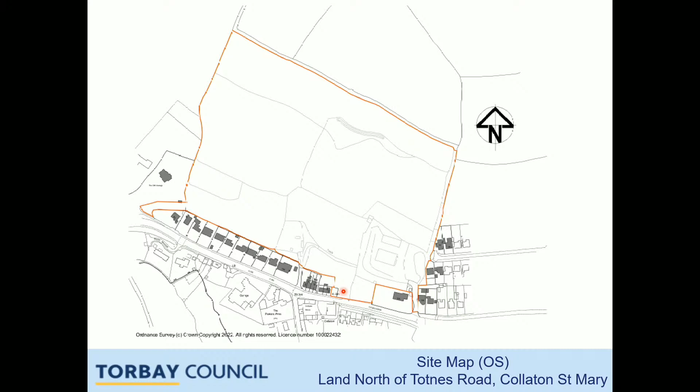Firstly, I'd like to update members on a late representation and an updated consultee response. This late representation is from an occupier of a property off Totnes Road, and it covers drainage concerns. It relates to comments received last week and an update earlier today.

In terms of context, this is an indicative plan submitted with the outline application. It's expected that development will run roughly in line with the rear plot boundaries of Borough Park Road, along the contour of the hillside, reducing slightly as you get towards the church.

The upper field section here would be public open space, enhanced with landscaping and ecological mitigation, and there will be some communal facilities in terms of an equipped area of play, some allotments, and orchards.

Down here was expected to be part of the drainage infrastructure, marked as a gap in the development with the blue star. There was also some pedestrian connectivity expected near the junction with Totnes Road and Blagdon Road, and also a desire to link to Borough Park Road to the east.

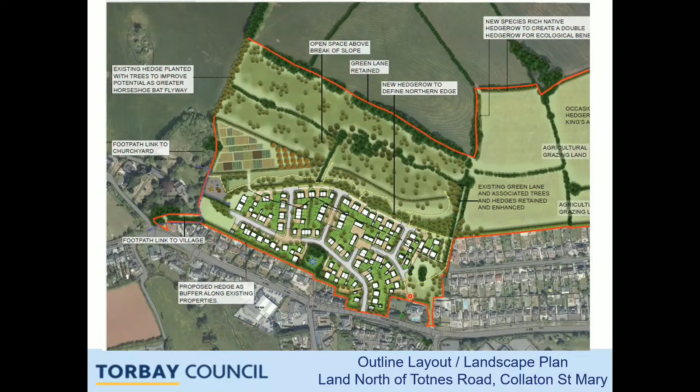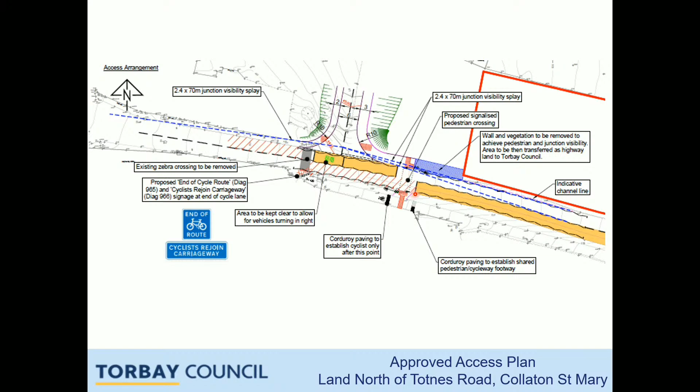So this is the indicative plan with the approved access, and for context, this is what was approved at outline stage and is fixed. We've got a simple junction in with a moved crossing facility here, and some enhanced signage and road coverings. This is the area of the proposed access.

So this is the proposed layout that is before members. The layout here broadly accords generally with the outline plans. The extent of development again loosely spreads across the hillside in line with the rear of the plot boundaries with Borough Park Road.

Public open space is again here to the north, including a new linear field hedge boundary as part of some replacement green infrastructure. Drainage infrastructure is also expected to the southern boundary here, which we'll show in slides in due course, and community facilities in terms of an equipped area of play, some allotments here and parking for the allotments.

There's also a pedestrian link to the edge of the site to connect to Blagdon Road and in and around the area of the school and church, and also to the edge of the site here with the ambition to provide a sustainable link to Borough Park Road for pedestrians and cyclists.

So this is a slightly close-up view of the proposal. It's substantially a scheme of detached dwellings with 68 out of the 100 units being as such. The remainder are provided within a number of short terraces, centrally within this development and also here. There's also 4 semi-detached dwellings and 8 apartments, and the apartment block is nestled in the eastern corner of the site.

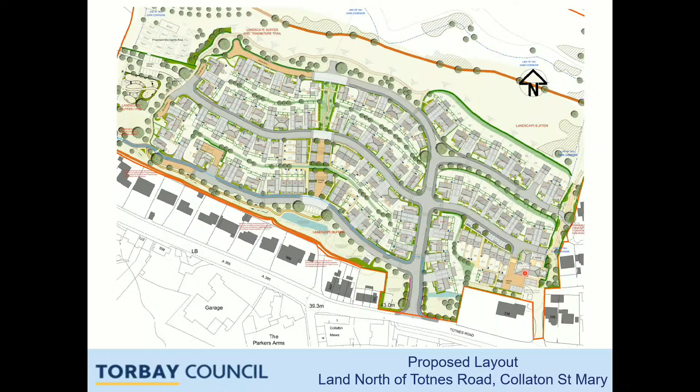So this is the proposed accommodation plan for the development, colour-coded for the different size properties. We have 1-bed units in yellow up to 5-bed units in orange. You see predominantly the development is a mixture of 3 and 4 beds, which are the green and the purple.

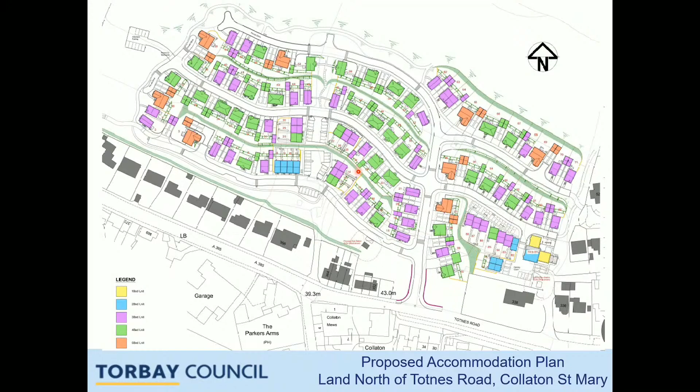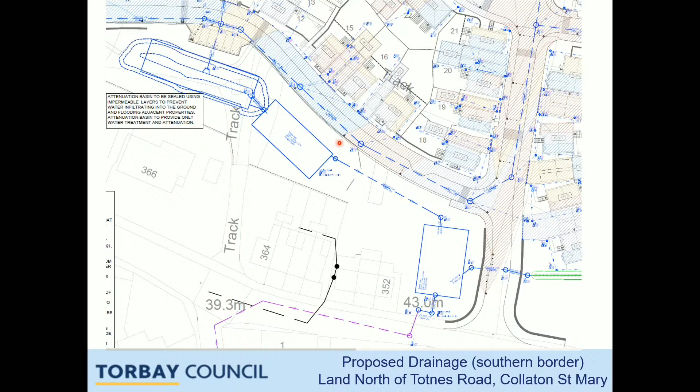So this is just a picture of where the storage basin is. This is number 366 here, Totnes Road, and the open, shallow attenuation basin is here. Then we have the storage tanks drifting through towards where the access point is.

So in terms of materials, the dwellings will be largely a mixture of rough cast render or a red brick, and there is a variety in terms of the slight texture and colour of the red bricks being proposed. The current roof material is 3 types of concrete roofs being suggested, and as per the recommendation, there is a proposal that further thought should be given to this material in order to provide something more contextually appropriate for the rural context.

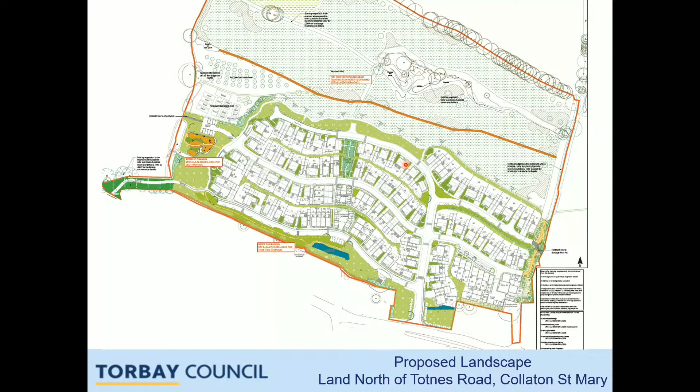On the western element, there are the communal facilities touched on earlier, including an equipped area of play, as expected through the outline, which will be close to the border of the church.

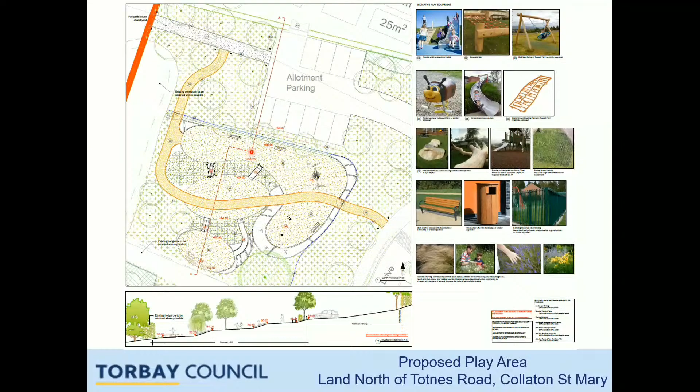The northern section will have public access as an informal open space area with enhanced planting and ecological features like reptile areas, receptor areas, and a new linear replacement hedge border for the existing field hedge that is to be removed as part of the development.

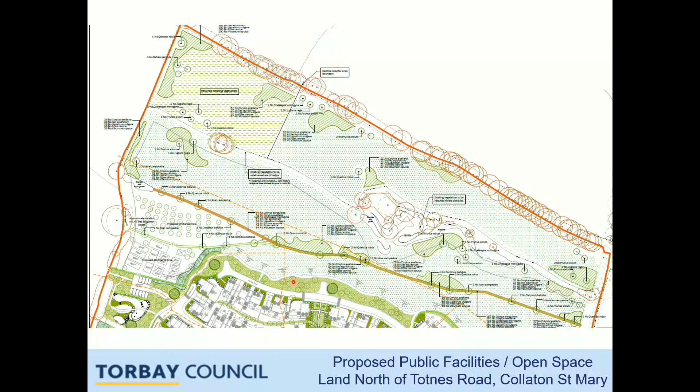Along the southern border, there's been an additional area of green space. The outline proposal suggested a back-to-back relationship with the existing properties off Totnes Road. However, the new proposal provides extra breathing space by presenting a road along the southern border and a green trim trail, a sort of green play walking feature, which will be on the natural route potentially for people accessing the school and church.

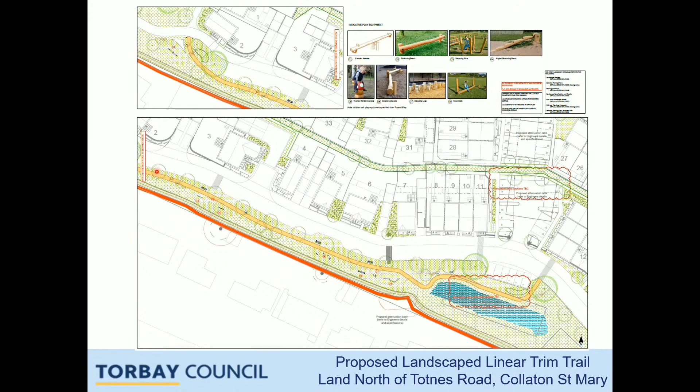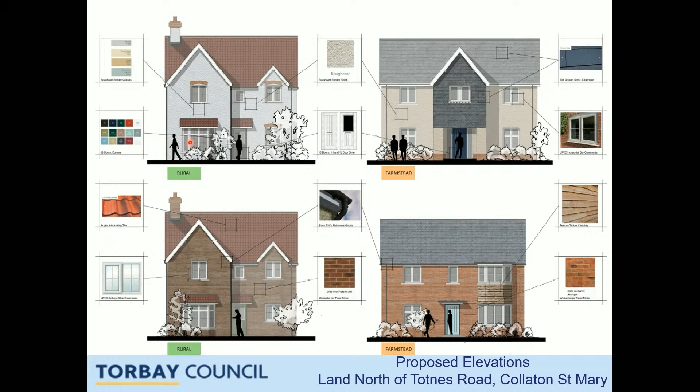Moving on to the character of the proposed dwellings, there's a mixture of rough render and red brick with differing roof materials. Within the different character areas, there are varied treatments of feature gables using secondary materials such as tile hanging or timber cladding, as opposed to full render, along with differing treatments of window surrounds and bay detailing to provide variety.

Here are further examples of the dwelling types proposed. You can see some small gable features reflecting local character properties in the area, and some properties with chimneys to provide enlivenment of the roofscape.

This montage suggests how similar dwelling types will be treated differently within different areas, in terms of singular elevation materials or using a secondary treatment such as tile hanging or timber, along with different treatments of window surrounds and bay details.

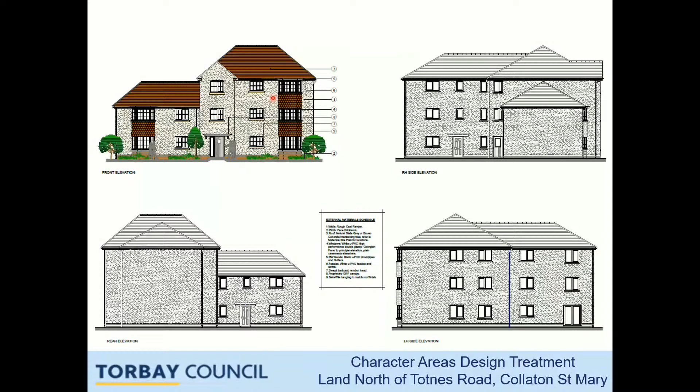All of the properties are two-storey, except the apartment block, which is a three-storey building with two-storey wings. There's some tile hanging to break up the massing, finished in rough cast render to reflect the rural context.

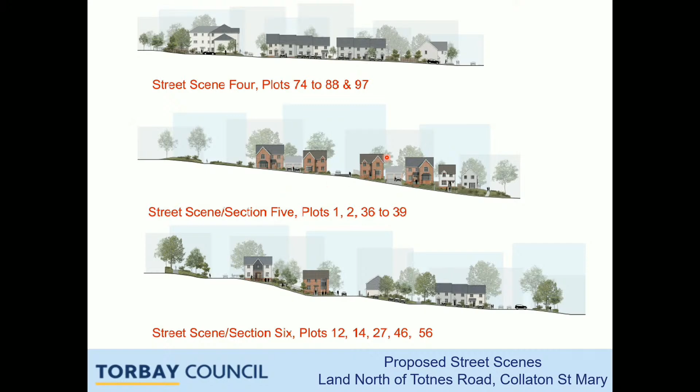Here are some further street scenes. You've got the apartment block with the short terraces that sit nearby, again finished in rough cast render, and a street scene adjacent to the equipped play area close to the western boundaries of the site.

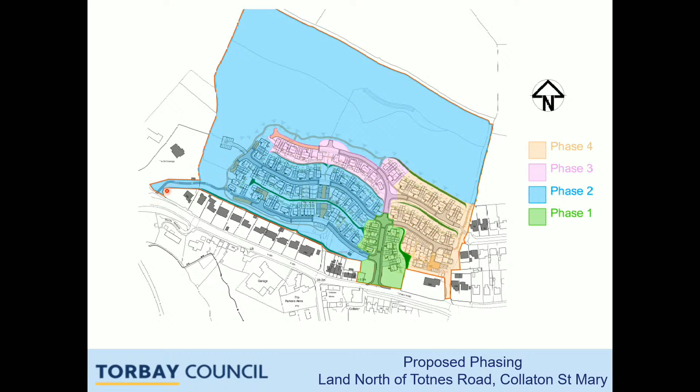So the key issues have been outlined within the committee report for members, just highlighting in bold some of the matters that have had a fair degree of discussion through the course of the application. As mentioned, there's been some protracted discussions on the design and visual impact, both of the dwellings and the landscaping, including the boundary treatments.

There's been substantial enhancement in terms of trees and border treatments through the scheme, utilising additional use of stone for some boundaries, removing timber for some of the more prominent side and rear boundaries for more robust material options, and softening the development generally in terms of trying to respond to the rural context.

In terms of flood risk, there's been a few iterations of the development proposals. Obviously, the basic parameters of the scheme remain unchanged in terms of the form of the flood risk system, the surface water system, in terms of attenuation tanks, where they are located, and their general parameters.

As mentioned, there's been some additional information fed through a series of rounds of discussions, and we currently have proposals that are largely happy with the drainage engineer's comments earlier today.

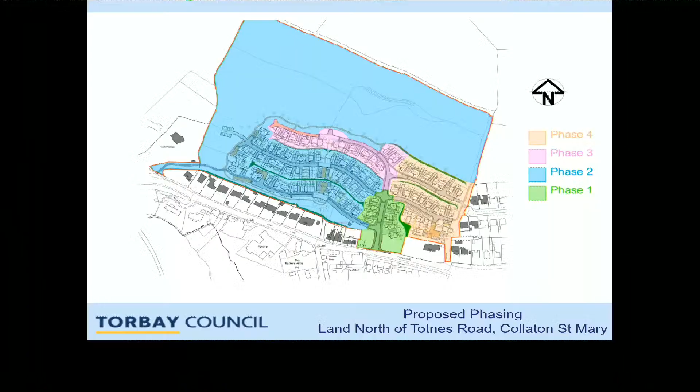You did flash up on the screen very temporarily updates regarding the flooding. It's a massive issue, as we all know, on this application. Would it not have been better for us to have circulated it around to the members, even a couple of hours before the meeting, so we could have had a bit more of a hold on it, because there are so many aspects to the drainage. I don't know about other members, but I've been reading through a 30-page report, and suddenly we get just a few lines on a screen which I'm struggling to read. I just wondered whether it would have been possible - what time did that come in, if I may ask?

I think we have to consider we are where we are. If you want more detail now and more time to consider what's on that screen, because I agree there's a lot of important information, I'd urge that your question be directed towards allowing Mr Jones to talk through that more, rather than the potential or alleged failings that led to this point, because we have the information now. If members were ultimately minded that receiving this information so late was counterproductive to making a decision, that may inform your overall decision about this application. But I don't want to get into why this didn't come out sooner. If you want to ask the case officer to go through that detail now, that would be a good time to do it.

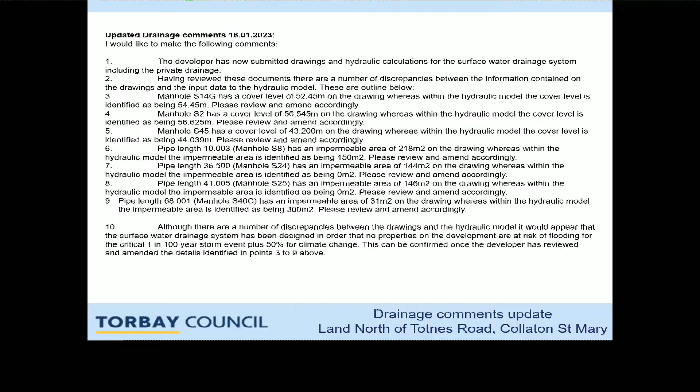Well, to be honest, yes, we do need the detail going through, but I feel that going through so much detail in such a short space of time - I don't know about other members, but taking that in is going to be almost impossible. And also, how can we make informed decisions on something that has only just appeared before our eyes? But that's just an observation.

I sympathise. If members feel collectively that this is such a substantial piece of information presented at a late stage, and you don't feel confident you can make a fully informed decision on this application because of how it's come in - i.e. late - then you have options in front of you in terms of what you do with the application. I would remind members of that. Of course, I totally understand that. All right, thank you, I'll leave the further question till a little later and wait for other members to have a go. Thank you.

Councillor Kennedy, please. Thank you, Chair. I've got a few, can I rattle them off? Okay.

Green infrastructure had concerns - have they been resolved? I'm not sure that I've read anything that says those have actually been resolved, so can you give me an update on that as well, please? Yes, sorry, I'll just try and find a quick copy of the committee report.

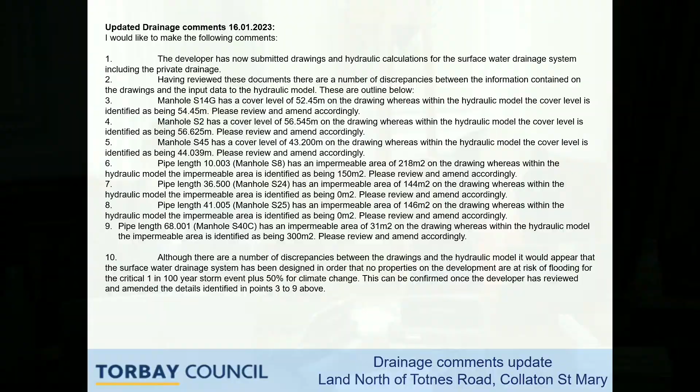So he's principally saying on point 10 that it appears the surface water is appropriately designed, subject to confirming the minor points identified above, which are a list of manhole details and pipe lengths—very minor things, not the overall system design or storage capacity requirements, just detailed elements. Those details have already been submitted and are with the drainage engineer. But principally, point 10 confirms he thinks the system's appropriately designed, not increasing the risk of flooding. He'll confirm that once the minor detailed matters, points 3 to 9, are submitted for his review. I would always expect that to be established before we release any planning permission, so all the drawings are correct and require no further submissions or amendments.

Yes, I think so. Thank you, Chairman. I'll think on that one.

Could I have one other question? It's to do with parking. You showed a block with apartments. What's the parking position for that? Because you mentioned a car park elsewhere and parking on properties, but not for the apartments.

Yeah, so I believe I concluded within the committee report on that. From memory, there is one-to-one parking and there is visitor parking within that element of the scheme. I believe it was 2 visitor spaces, but I believe that's been reduced to 1 because I noticed that one of the apartments didn't have an allotted space. So that's been amended through a late plan, just to ensure that everyone has one-to-one parking, which is what is expected for apartments. So it's a relatively small apartment block, so one visitor space is considered acceptable in that context.

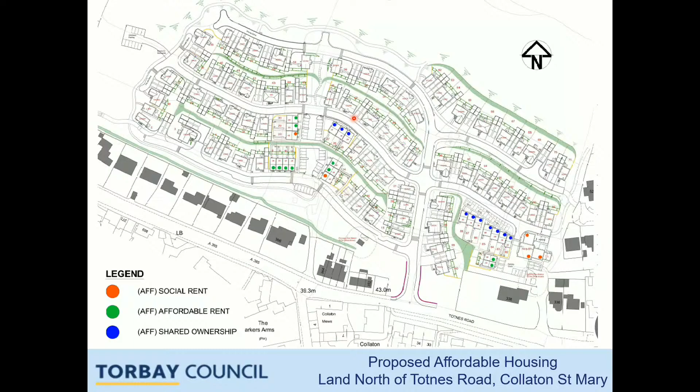Councillor Kennedy, please. Thank you, Chair. The attenuation tank system, how is that going to be managed and by whom? So the management is established through the outline permission's legal agreement. So there is the requirement to submit an open space and SUDs management plan to the local authority. Basically, that's generally not uncommon for development, will be, say, the private management of those key areas. But that's established through the Section 106 at the outline stage.

So are you saying then they're going to be managed by a private company? Yes, that's quite common, and that's what I would expect. So, well, my understanding, if it's going to be managed privately, at some point it needs to be handed over to South West Water. I think there's got to be. I'll go to legal on this one because I think there is something about them being handed over to South West Water. But my main concern is if anything happens to this management company and they fail for whatever reason, what position are the residents of this development going to be in, and us, Torbay Council, if it's not handed over to South West Water?

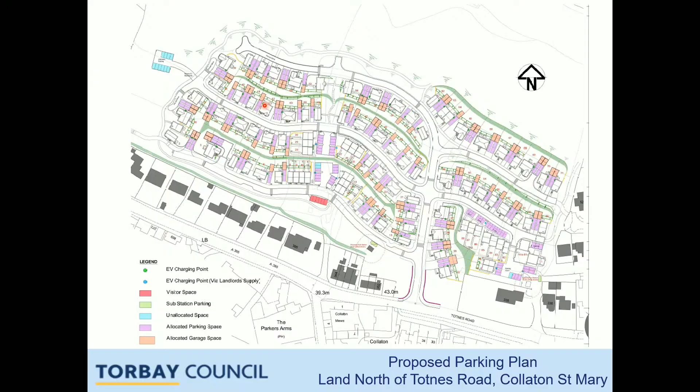Okay, thank you. So that's going to really amount to a bit of a bun fight, isn't it, really? You know, who gets to the parking space first, and they might be visitor allocated, but in reality that's not going to happen, is it? It's going to be used because there's going to be a lack of parking spaces for those particular spaces.

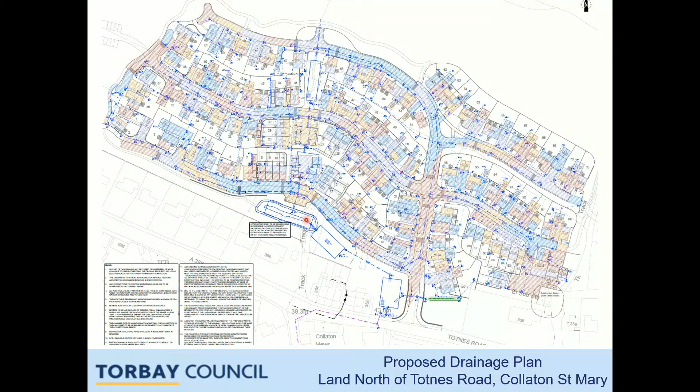That says the drainage system that is approved has to be delivered before they can occupy the site. So obviously the developer, if they're spending many millions of pounds developing the site, they need to know that they can deliver a drainage system that restricts any form of occupation.

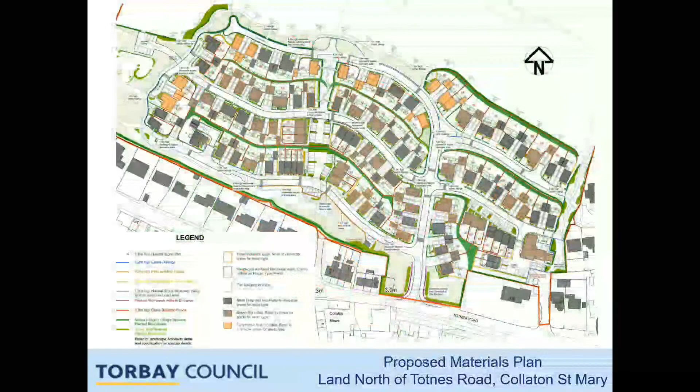Okay, thank you. And I've just got one more, sorry to be a pain. Looking, not this particular plan, but you put up another plan with the red line all the way around the outside as to... yeah, have you got that one on the screen, please? One at the very end. Yeah, go back. No, not that one. Yes, that one.

Just for clarification, so the developer owns all that within the red line? Yeah. Yes. Okay. Right. So at the moment, we've got planning permission for up to 100 dwellings. Yeah.

What is worrying and concerning me, and is actually in the report, so it's obviously a highways problem as well, is that if one more house is built, then the highways have recommended that a provision for an emergency access 3.7 metres wide should be included. So what's worrying me is that if we don't put this in as a condition now, and then more dwellings...

come down the line for approval in a separate application, it's going to be too late to put in this emergency access down the line, because they might say it's not viable, it can't be done, we haven't got room for it. Whereas is it possible to have this condition put in so if one more house is built to take us over the 100, we have covered ourselves with the emergency access. It's in the report as highways have got an issue with it. Thank you.

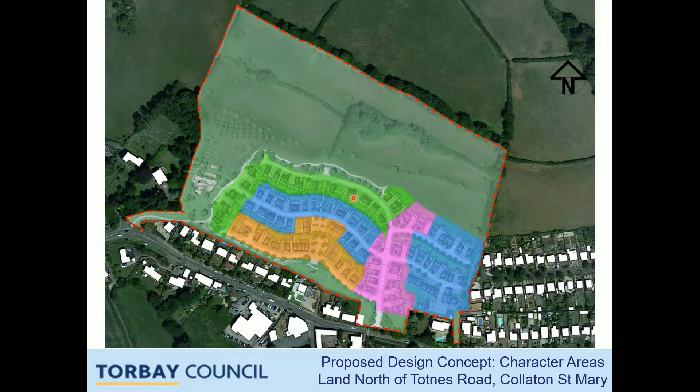Obviously, it may be in their interest to future-proof it, and there is the opportunity within the resolution to continue conversations on that to potentially use this area. But the principal point is that access was agreed in detail at outline stage, and hence requiring them through condition is likely to be considered unreasonable, I'm afraid. It's just that the highways had still had a really big issue with it, and they've written that in the report.

Sorry, Councillor Thomas, this is one best reserved for debate rather than question. I'm still trying to get it in as a condition. Okay, that's my issue. And there'll be an opportunity to do that at debate stage as well. Right, okay, thank you. Councillor Mills, please.

Yeah, I just wanted some clarification. When we were talking about flooding and drainage, it was mentioned, I think it was Mrs. Ormsby, that the runoff wouldn't be any different because the houses were there to what was there at the minute. Can she just explain that? Because obviously if you've got tarmac drives, tarmac roads, houses, the runoff will be different. Yes, it will be different.

What I meant was that the actual rainfall that lands on the site won't change. It is what it is. But yes, it does need to be managed because the way that rain runs off hard surfaces is different to how it might run off onto green fields. But depending on the nature of a green field, depending on the soil type, sometimes it will percolate in, sometimes it actually does run off quite quickly. If you've got a clay soil, for example, the runoff can actually be quite quick off a green field. In other sites, it will percolate in really quickly.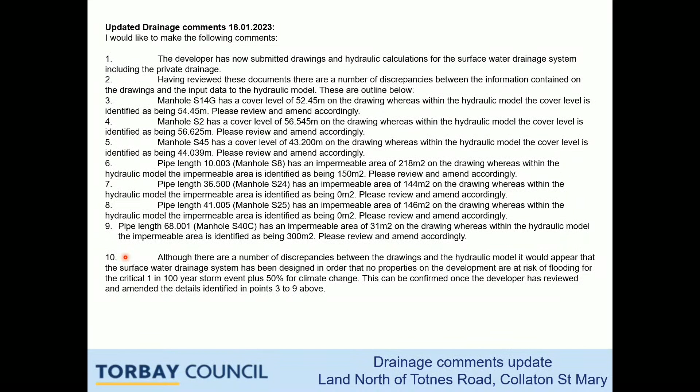Just in terms of the ecology quickly, the ecology section did mention that the county ecologist has requested a number of conditions, but they are covered through the outline application. So there was a paper trail there in terms of not disagreeing with his requests, but his requests are already secured through the outline consent. You can't duplicate conditions. So as a planner, that's why the conditions list is more streamlined rather than simply putting on conditions that he suggests.

What I'm asking for is that as lay people, we all understand how those conditions are put in. We need that clarification. It wasn't clear in your report how the impacts on the greater horseshoe bat and reptiles were being mitigated. He just mentioned conditions, and there's no further information. I think we should be able to have that information in front of us so that we're satisfied it's been dealt with. Ms Ormsby, did you want to continue coming back to Councillor Kennedy on some of those other points that she raised?

Just one last point, just for clarity, that subject to the adjustments that Mr Jones has suggested in his report, the scheme will be fully policy compliant in terms of car parking provision.

This is a contextual view of the site. You can see it sits within the Paignton and Roundham Conservation Area. This is a closer view of the site - this is Keysfield Road, and this is the site in question, with 4 red dots identifying the borders of the site.

Just to note some context in terms of the scale of buildings adjacent and the relationship to the rear of the site here, with communal parking. And this is a view from the other side.

So this is the existing building. The site extends with a tree-lined border here and to the front of the site. To the rear we have holiday apartments and flats and some parking areas.

This is a street view of the site and the building in question, which is in pretty poor repair and has some fire damage. This is a view from the other side. It's a Victorian villa, and it's highlighted as a key building within the conservation character appraisal.

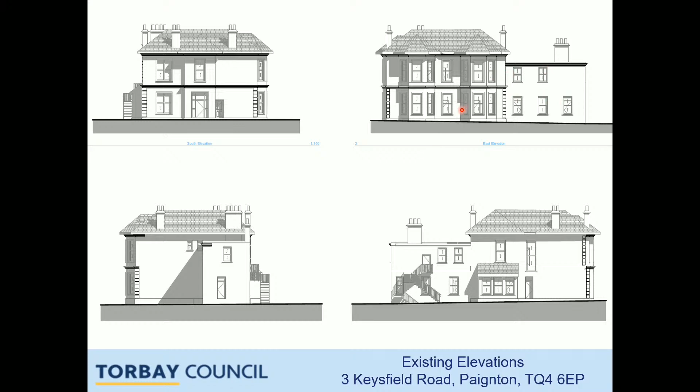These are the existing elevations - a large two-storey flat roof rear extension there - and the internal layout of the existing building.

The proposal is to demolish the building and provide 14 apartments as stated. The footprint is largely similar to that previously established and consented through a conversion and extension scheme that members saw a couple of years ago.

It retains a garden setting to the side of the building, and this one provides 16 parking spaces for 14 units - 1-to-1 plus 2 visitor spaces. There's also a designated cycle store and a designated waste store here, within a similar area to the previously consented scheme.

Mature trees are protected and retained along the front of the site and to the side through tree protection plans. However, as mentioned, the landscaping is a reserved matter and would come in for future consideration by members.

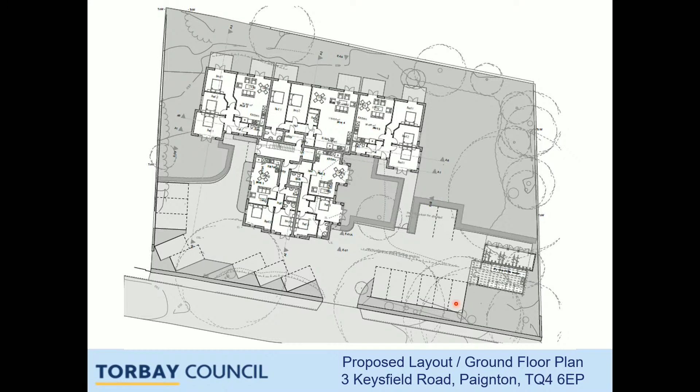There are 2-storey subservient wings running along to either side, and the distances to the side of the plot present no undue impact upon the amenity of neighbouring occupiers or significant trees.

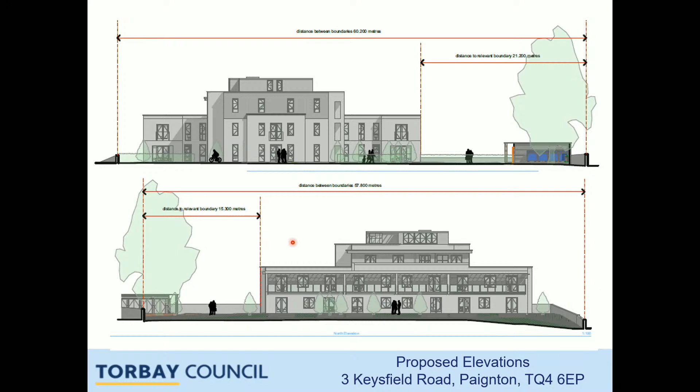This is a proposed side elevation showing the setback of the roof element and some of the detail of the bays - recessed, punctuated bays - detailed in a modern form here.

Then a staggered rear elevation, similar to the consented scheme, with small terraced areas to the apartments, providing slightly greater separation distances to the rear.

The impact upon amenity to the rear is largely limited due to there being communal parking and communal gardens, and the buildings themselves being set at slightly oblique angles in terms of the distances and level of interlooking. Future reserved matters has potential for replacement landscaping to soften any impact to the rear along this boundary.

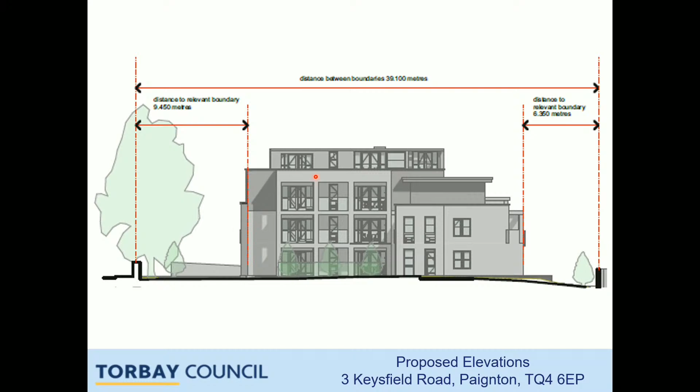This is the other side elevation, similarly with a punctuated bay. There are some views in a minute which will probably show you more clearly what the expected design outcomes are over this drawing itself.

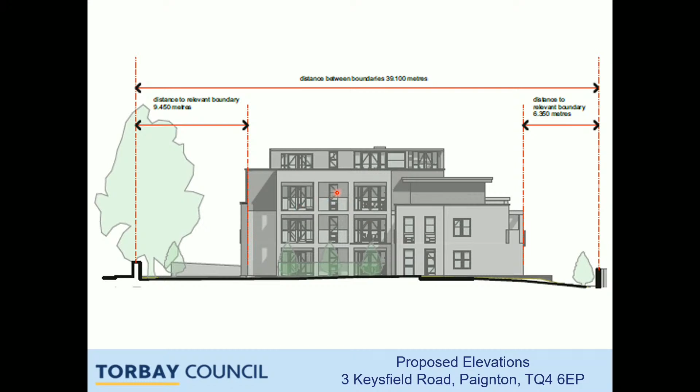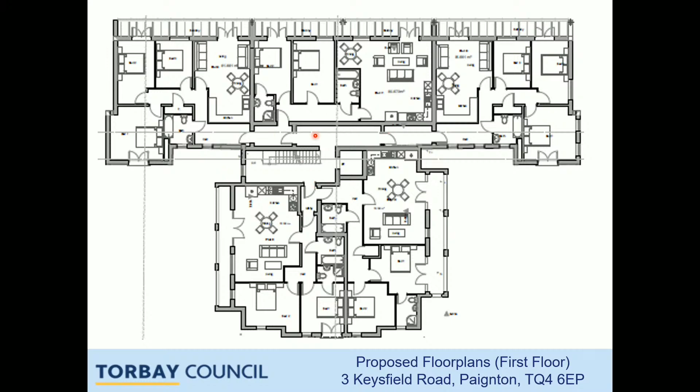As you go up through the scheme, we lose the side elements above 2 storeys, and there's a single unit at the top, recessed from the edge of the building below.

So we have some visuals submitted. These are visuals of a slightly revised scheme which was submitted through the course of the application, following some concerns on the design outputs for the scheme, considering its heritage impacts, setting within the conservation area, and the loss of a key building, albeit one that's in quite poor repair.

In terms of design changes through the scheme, we had the 3rd floor of the right-hand wing removed to create subservience to the central element. This reduced the scheme from 15 units down to 14, and provides some clearer delineation between the two.

We also had a reduction in the parapet detail to remove the top-heavy feel to the third floor here. And we reimagined how the elevations were treated to either side in terms of a modern interpretation of a bay detail. We also have some frameless glass to provide clean lines and high quality materials to help enhance the appearance of the building.

And we've had parking reduced slightly, which has helped retain a landscaped feel to the side of the plot, and less parking towards the front of the plot as well.

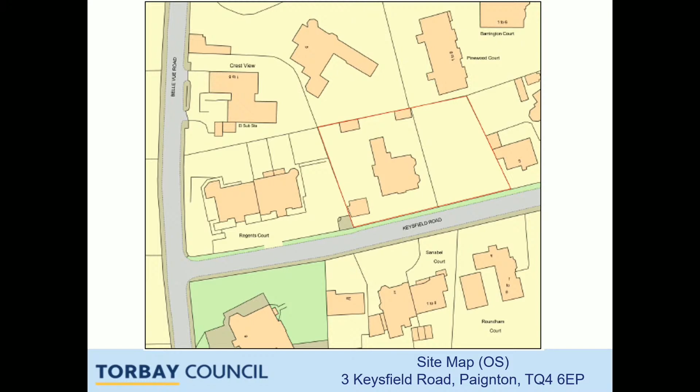So while you're looking at that - is the allocation of parking spaces okay, with a 3-bedded apartment getting one parking space the same as a one-bedded? The development plan doesn't provide a sliding scale for parking in terms of bedroom numbers or size of apartments. It simply suggests that one parking space should be provided per apartment, so it does accord with the local plan policy in that regard.

Sorry, do you have another question, Councillor Mills? Or was that it? No, okay. Councillor Kennedy, please.

Thank you, Chair. How have you referenced the heritage strategy?

The report principally talks about the development plan and the national planning policy guidance, and also the statutory requirements in terms of the setting of listed buildings and the character and appearance of conservation areas, but not to the newly made Torbay heritage strategy.

I'll leave it there - one more question. Just on the planning balance, given the conservation area, how do you justify the loss of, I think it's one of 2 remaining villas of that type?

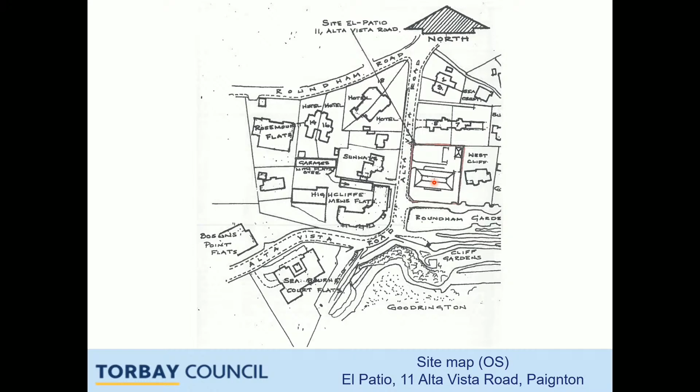There's currently a pedestrian access from both Alta Vista Road and Roundham Gardens, and vehicular access from Roundham Gardens. The site is outside of, but adjacent to, the Roundham and Paignton Harbour Conservation Area, the boundary of which is to the west.

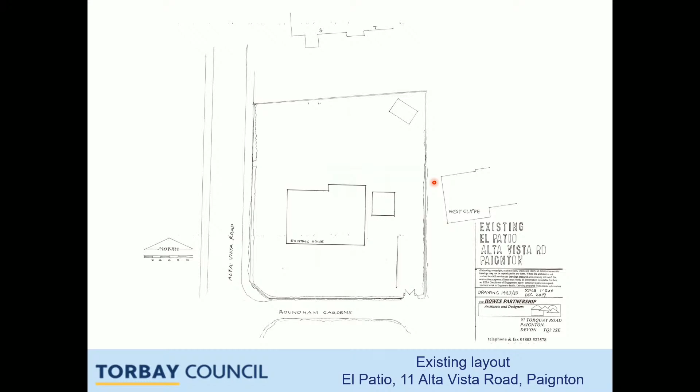This shows the existing layout at the site. And this is the proposed landscaping plan, which includes some wider finishes to the proposed building. You can see the landscaping details as set.

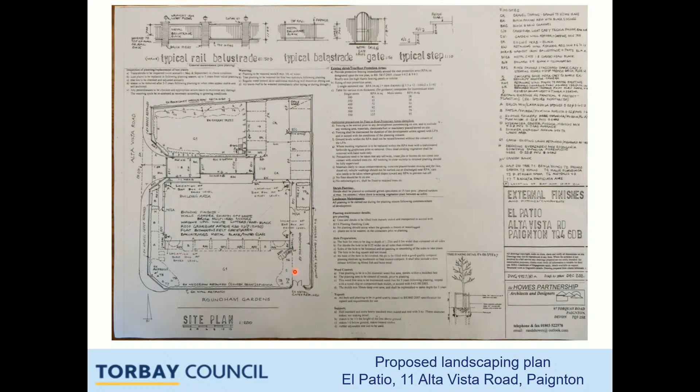This is the proposed new building in the central area here. You can see the car parking areas which were previously approved in terms of their location. What we're agreeing at this point is just the finishes of the hard surfacing area and the details of the landscaping and planting within the garden and tree area.

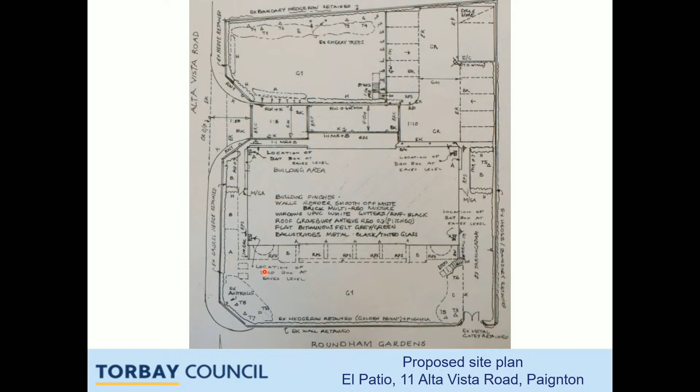The proposals include retaining the hedgerows on all sides of the site, retention of the existing lawns to the south of the proposed units, the formation of the 10 parking spaces using blockwork surface, a gravel access road and turning head for the parking area, retention of the existing tarmac access route to the south, new tree planting and retaining existing cherry trees, and the provision of bird and bat boxes in terms of biodiversity gain.

Key policies are the neighbourhood plan policies on design principles and residential development. The key issues are the landscaping and trees proposed, trees to be retained, and ecology and biodiversity, where it's considered that the details of the provisions are satisfactory for the scale and nature of development proposed, and that the landscaping proposed will be in keeping and in character with the area generally.